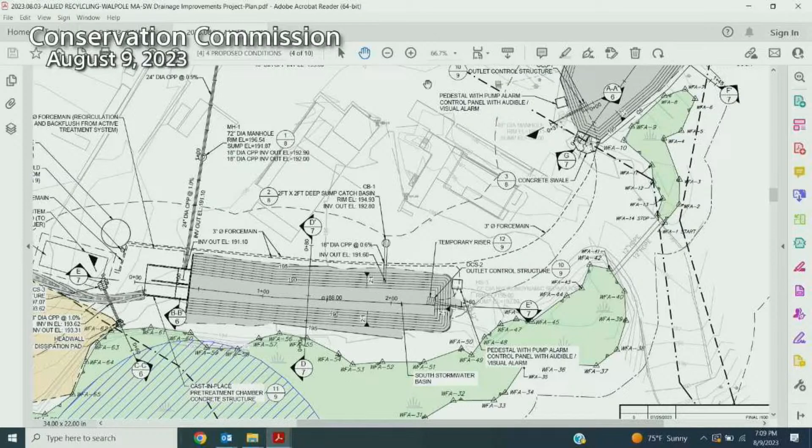They were installed some time ago under previous stormwater standards. These two basins are undersized for today's standards in meeting our water quality objectives under the multi-sector general permit. So we've worked with Allied and DEP to develop a really robust stormwater management system here.

So this involves reconfiguration of the two existing basins. We're going to expand the basins and increase their depth so they have more treatment capacity. And we are installing outlet structures in each of the basins that will be equipped with pumping facilities.

The pumping facilities will pump stormwater from the basin to the southwest corner of the site, where we are proposing an active treatment system. The active treatment system is not being designed by Geosyntec. That's being done by basically a manufacturer of these systems. They're out of Washington State.

The active treatment system will basically treat the water through a combination of coagulation, filtration, sand filtration, and then granular activated carbon. So it'll go through a series of vessels to be treated before being discharged to the adjacent wetland area.

The stormwater network that's existing now will largely remain, and what I mean by that is there's some catch basins and storm drains that capture runoff and drain into each of the basins. The southern basin, which is the long linear rectangle on the bottom of the screen there, will also have some drainage improvements on the site.

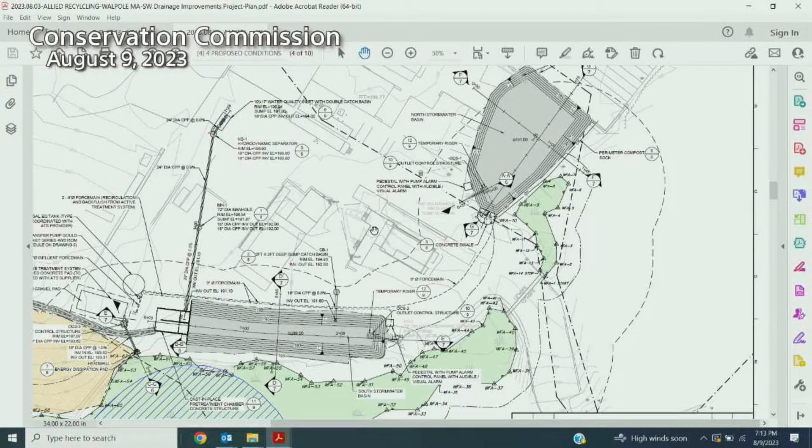But all of the work is within the existing developed portion of the site, including focused work on the two existing basins. Now, the basins, when they're excavated out, will be larger in size and deeper. The basins will be lined with an impermeable liner and covered with dense graded aggregate to protect the liner from maintenance activities.

We did include, as I mentioned, we've addressed the town engineer's comments that were previously provided and have included an erosion sediment control plan within this drawing set and the associated details, and have added some detail onto the pump system, the alarms, and contact information that he had mentioned.

So we do have the additional comments that we received here this evening. Again, I think they appear to be fairly minor and really editorial, making sure that the numbers of the details on the plan sheets match the numbers of the details on the detail sheets.

So I guess I'll pause there for any questions that the commission may have regarding the stormwater management system.

The existing north basin discharges through an outlet pipe to a swale that drains along the entrance road into two culverts that connect the wetland on the east of the entrance to the wetland on the west of the entrance, and then drains down. We're not changing any of the drainage configuration from the north basin - those catch basins and pipes are going to remain.

Really what we're doing here is expanding this basin, as I discussed, adding in an outlet structure. That outlet structure will then pump water through a force main to the active treatment system area. There's an equalization tank that will receive water from both basins to allow constant flow into the active treatment system. But that kind of summarizes the North Basin.

The South Basin is similar. There's less infrastructure currently draining to the South Basin - most of it drains via overland flow around the driveways and through the buildings to the South Basin. We're improving that by introducing some catch basin structures, and those will be connected into the South Basin.

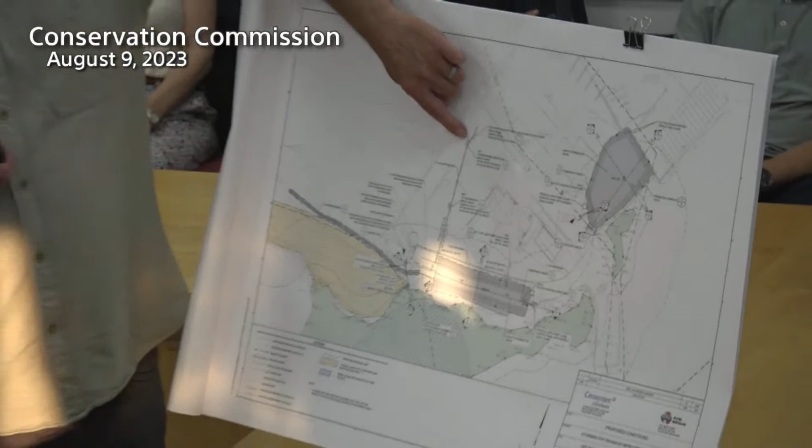This catch basin structure here is the water quality unit that I discussed earlier. It captures a large portion of the industrial area here that drains overland, like sheet flow, down and will be captured in this structure here. This structure will provide some pretreatment. We then have a hydrodynamic separator to provide additional pretreatment.

That drains down into the inlet of the new, or the expanded, South Basin. This unit here will also provide settling and sedimentation, and then that will drain into the basin. It has a nice long linear flow path to the outlet structure. That outlet structure with the pump will then pump the water through a second force main to that equalization tank, which then feeds into the active treatment system.

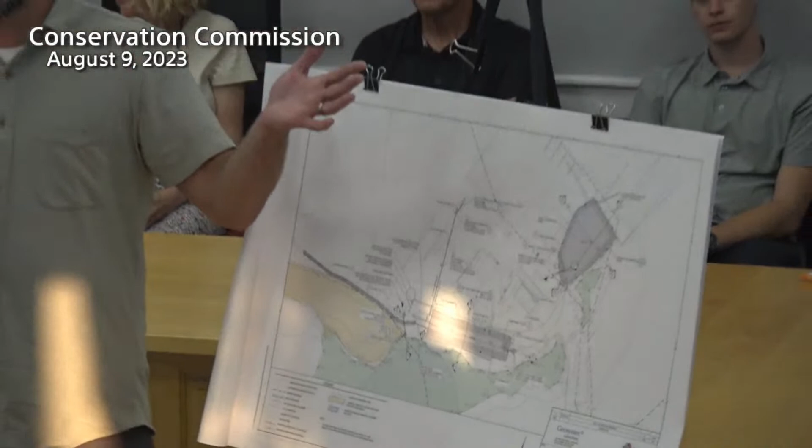The active treatment system looks like a construction trailer, or a Connex box if you're familiar with that. All of the equipment is going to be housed in there. There are a few additional tanks and vessels, like the sand filtration and the granular activated carbon vessels, that will treat and polish the water. Those will be located on a concrete pad in this area of the active treatment system.

Don't think I'm missing anything there. We did add the pump controls and alarms on each of the basins in an accessible, visible location. And really, whenever you think of stormwater management, you're always considering maintenance, right? If the things don't get maintained, they're not going to work properly.

Allied's been doing a great job with their permit requirements, doing over and above the permit requirements to do a lot of the maintenance to the existing structures. These structures will allow easy maintenance as well, such as this pretreatment structure - they're able to actually drive into that to clean out the sediment. So we work closely with Allied to make sure the maintenance requirements for this system is something they're comfortable with and capable of.

And then the active treatment system is kind of another level of operation and maintenance. The manufacturer works closely with the client or customer to develop an O&M plan. They come out from Washington, they start up the system, and they'll work with Allied on a training program to get them familiar with the unit. And then there's a combination of operation and maintenance for that active treatment system.

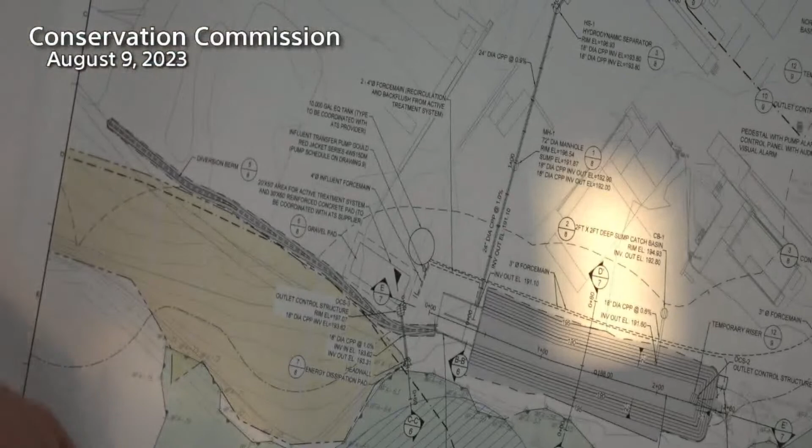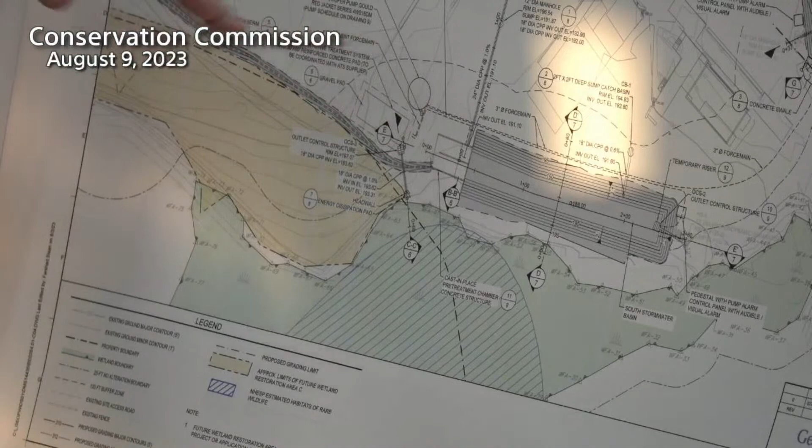We do show here an area labeled approximate limits of future wetland restoration area C. I want to note we added a note that's not part of this project. That'll be part of a future project that will eventually need to be evaluated, but this is here just for clarifying purposes, to illustrate that the proposed stormwater system won't impact that in the future.

And we've been really working with DEP on the stormwater components. They've been heavily involved, so there's been quite a bit of back and forth with the various project players.

So I think that's everything. Any other questions? Yeah, that sounds good, and I had asked for a summary of the changes from the last plan, which everyone has in their packet. Anything else? Yeah, I think it seems to be a well thought out, well detailed stormwater plan.

Okay, Dean? No questions. Okay, thank you. Bailey? Curiosity, who's the manufacturer? Yeah, Water Tectonics out of Washington State. Thank you, that's all.

Thank you. Anything else? Who will be trained? There will be responsible parties listed to contact in case there's an issue at the company? Yeah, so Water Tectonics has an O&M team that Allied has resources to reach out to if there are any questions. And I should mention, the active treatment system is set up so that Allied and Water Tectonics can actually log into the system and see how it's performing. So it's an online system, so they can visually see if there's any trends that would need to be addressed.

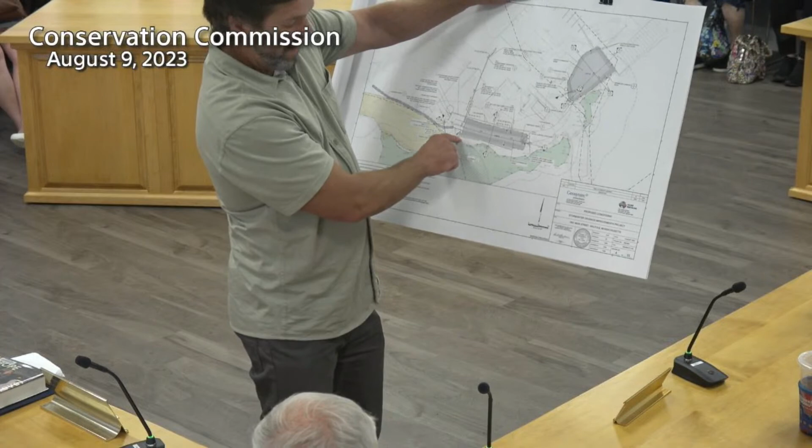Probably a little past that, somewhere in here. Okay, that makes sense. So just mark them on the plan, and then we'll give you the write-up, and it will go on a concrete marker. I have a detail I can send you.

I think what I'm understanding is we can close the hearing tonight with a condition. So we'll address the engineer's comments, add these markers. Usually what we do is close the hearing, issue the condition, and then any outstanding revisions we like to get before we actually send out the order of conditions.

If you can get them back to me close, that would be great, that's the way we like to do it. Okay, thank you. So now, anything else for the order?

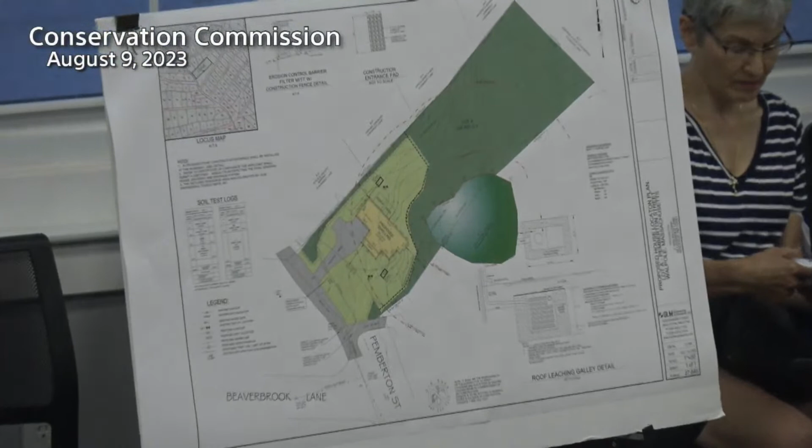We're not proposing anything on the rear of the lot at this time. The proposal is to build a single-family house up on the Pemberton side of the site. We've indicated the 25-foot buffer from the isolated wetland.

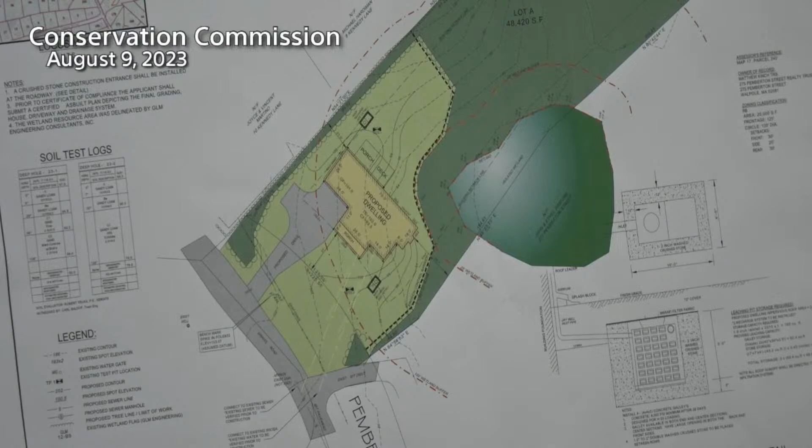Just to point out, this is an isolated wetland. We only filed this under the local bylaw. We did not file under the DEP because it is isolated, and it's only protected under your local bylaw, just to put that out there.

So we've been out to the site. We did a topo survey. We flagged the wetlands. Joyce Hastings from our office went out and did the flagging. We are proposing a single-family house.

I have been out to the site with the town engineer. I dug 2 test holes on the site for the drainage system. I have one in the rear of the property here, and I have one up in the front here. We did not hit groundwater when we dug the holes. We got down approximately 10 feet. We had some good gravel in the area, so it was conducive to provide recharge for the roof runoff.

So we are collecting all the roof runoff from the house, directing it to those recharge systems. There's one in the front right side, and then one in the left rear. We're showing a deck and a porch off the back. The house will be sitting on the street. The garage is on the left-hand side, coming on the front.

There is a walkout basement that'll go towards the wetland area, to reduce the grading around this side of the house. We're kind of matching up to the existing grade on this back corner with the basement level, and then obviously the front level will be higher.

So the lot slopes from front to back, basically from Pemberton Street towards the wetland area, and from the homes along Kennedy Lane towards the wetland area, and then another high point in the back. So the wetland area is the low point on the site, and everything else directs towards it from Pemberton Street and from the portion along Kennedy Lane.

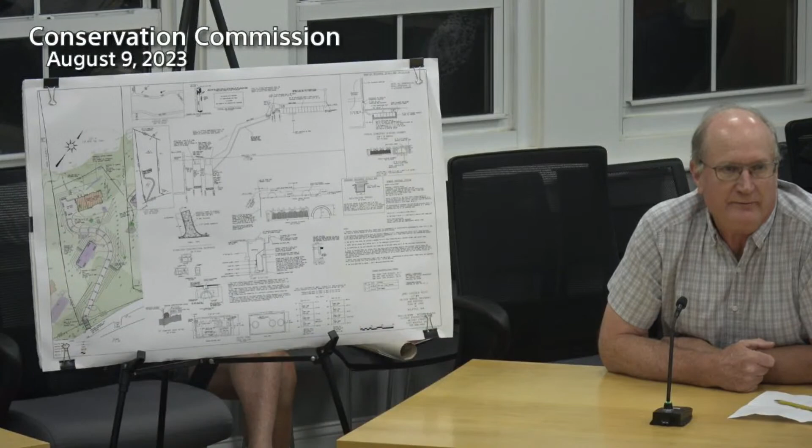So it was a little hard to read because it was so small off to the side of your details. Well, we could have made it at 30 scale, so that makes it smaller. It's basically the septic system plan, so yeah, it's just the septic system plan.

And my other comment, I forgot to write in my report, but the erosion control should be hooked up along the boundary of the property line going this way. Unless he's doing that lot too, but it just kind of ends here at elevation 176.

Oh, does it go up there? Yeah, it's hard to see, sorry about that. It's hard to see. I see it now. Okay, yeah, all right, no problem there. You know what it is, the AutoCAD's in color, so they see it, and then the draftsman...

I have another comment. The roof infiltrator that you have kind of smack in the middle of the backyard there, is there any way you could put it off to either side? I was just thinking, often with these houses they want to do something later on, a pool or a patio, and that's in their backyard, and you have the big, long infiltration unit in that area where someone would probably want to do something else.

It's more of a practical comment. Yeah, so what the draftsman's trying to do, because this is what I'm always telling them to do, he's trying to follow a contour line so that it can be placed shallow under the ground for its entire length. What I could do, it's a walkout, so we only need to be 10 feet from it, and this is going to be leveled off, so I could just run it that way. I think if there's going to be a pool, it's going to be more than 10 feet from the house. Or I could put it right at the very limit of work.

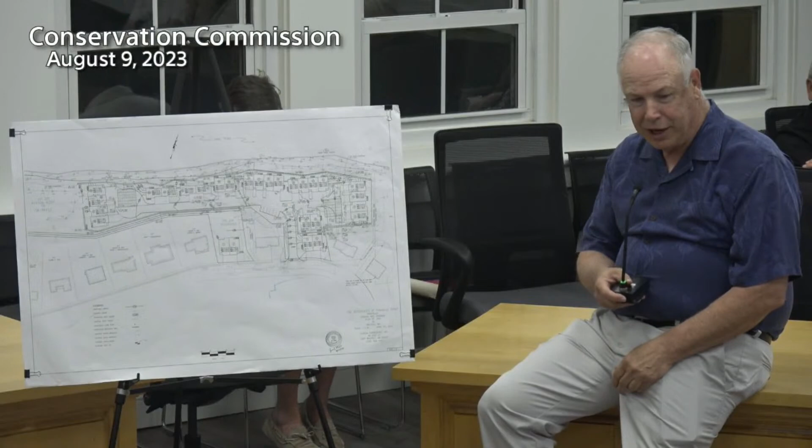No, okay. Representing the applicant: good evening, Lou Petrozzi for Wall Street Development Corp. Essentially there are two parts to this request for determination. One is to provide clearing so that we can go in there and do testing and other work related to our proposed project for the development of the parcel. In reading the regulations I thought most of this work was permitted as incidental to the property, but Landis suggested I come before the commission to discuss what we're planning. As you can see, this is the proposed development site along the pond. We have to test for stormwater management at each end of the site.

In addition, we need to do soil testing along the roadway for stability and ground conditions to investigate the site. I don't know if you've been on the property lately, but a couple of years ago we did cut it, and the commission fined me for cutting it. But it really is overgrown with, I call it invasive species, and it's practically impassable for us to get down there. So we would like the blessing of the commission to go in there and do what's necessary for testing on the property.

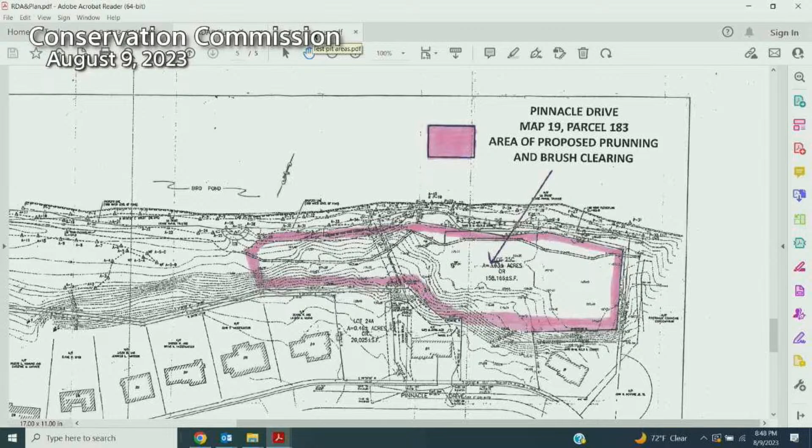So the plan that you submitted with your request for determination was this plan? Yes, you're right — I didn't have that with me, I just had this in the car. Your request is whether the area depicted on the plan and map reference below is subject to the jurisdiction of the Wetlands Protection Act — that's one item — and the other is whether the work depicted on the plan is subject to the Wetlands Protection Act. Right, and on this plan you phrase it as proposed pruning and brush clearing. Yes. In the determination you refer to it as annual maintenance, cutting and/or clearing of brush and other vegetation. Correct.

So, I guess first of all, it's not really clear what you want to do here. It looks like you want to prune and brush clear, or cut and clear brush and other vegetation, in this whole pink area.

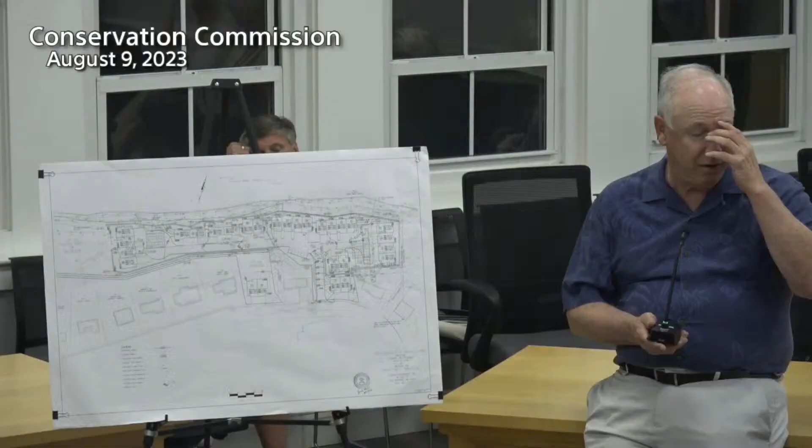Yes, and since I sent you an email, I had given you examples of the equipment being used. But in addition, we need to get into the property and go a little further to do a couple of deep hole tests for our stormwater management. That's why I brought this plan tonight, to show where we have to go. We have to go down to this area and do some testing, and while we're there, do some testing to see what the soil conditions are along the proposed roadway.

So I guess it's expanded beyond what was originally submitted. Right, so when you submitted before, you indicated it was under 10.022B to G, activities that are temporary in nature for planning and design purposes.

Yeah, so what we discussed was the brush—my experience with engineering practice is they cut a very narrow swath for a mini excavator to go in, pick a spot, excavate, do a test pit, and go along the same path. They may go to another area and do a test pit. You submitted a drawing that showed two test pits, so I think that was the guidance at the time, that you were just going to those two areas with just a path going to each area, and that was acceptable practice.

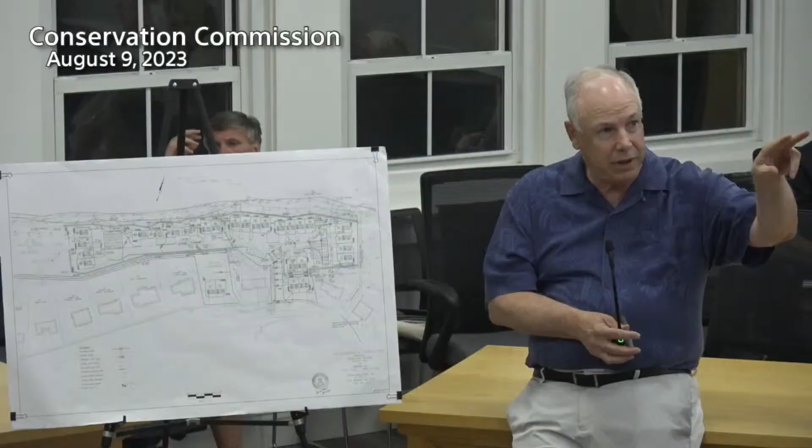Right, so is that the plan I submitted that's on the screen right now? Which is this plan right here. All I'm simply adding into this equation is that we're gonna do some testing along the roadway, just along this area right here, to see what the soil conditions are.

Well, what you've submitted is a rather large area of the lot that you are proposing pruning and brush cutting, or clearing of other vegetation, and that's what you're asking for the determination.

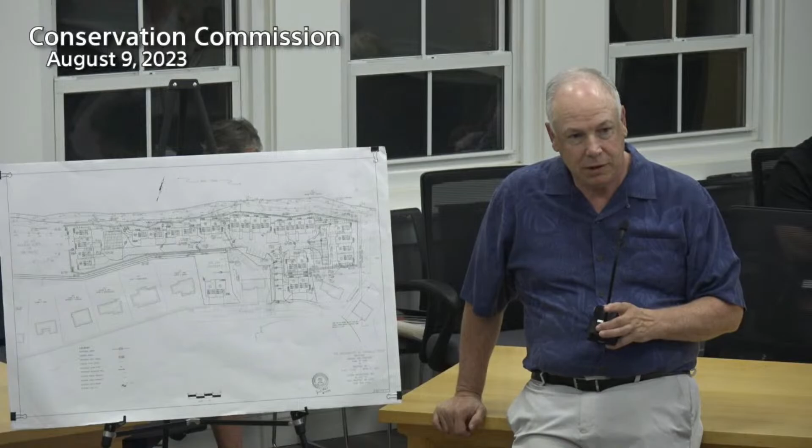So where did I submit that plan right there with the test pits? Isn't that part of the same submission with a letter? Well, it's been a while since I submitted it, so— I didn't think so. Whichever plan was physically attached to the determination, as well as the description in the determination, being annual maintenance, cutting and/or clearing of brush and other vegetation.

Well, we want to be able to walk in there and clear the brush, okay? As you probably know, this is all paved area, a parking lot. So we want to go in there and clear it down to the ground—it's mowable with that machine I gave you a photograph of. So we want to do that, and then we have to go in there and do testing.

I mean, what can I tell you? We have to test for the soil conditions for the stormwater management. So now I'm directing my comment to the commission.

If the area depicted on the plan is subject to the Wetlands Protection Act, I would say yes—it's buffer zone and riverfront area. That would be a positive, that the area depicted on the plan is subject to the Wetlands Protection Act. If the proposed work is subject to the Act, again, I'm getting kind of mixed on this—if you go by the determination, it's the purple area, and that seems like that's beyond the temporary path for tests for planning and design; it doesn't really meet that exemption.

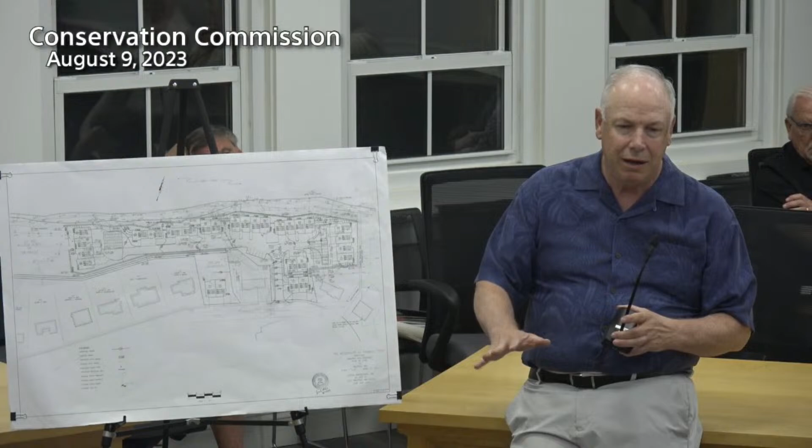When you say clear, we're not clearing, we're just brush cutting. It says clearing on it. Brush clearing, which is twigs, things under an inch in diameter, kind of stuff. I think the point is, there's one thing about getting to an area, as Landis described, where you want to do a test pit—you make a path, do your test pit, and go out.

So it would not be a complete area. You're not going to do a test pit, you're not digging up this whole area for a test pit. No, but we're gonna probably do sporadically along this area here.

You folks know you're gonna basically say, well, what's in the soils? So we want to be able to come back and say we did testing on the site and this is what we found. Whether or not you want me to come back with another application, I will. My original intention was to come in here and clear this. Since then, we've had several meetings with the zoning board, and they've given us comments, and we need to go in and determine for our stormwater management what the soil conditions are.

You don't want to allow me to do that. No, you are allowed to do it, but not to clear the whole area to get to a test pit. That's the point. If you want to clear the whole area, then tell us that's what you're going to do, and then file appropriately.

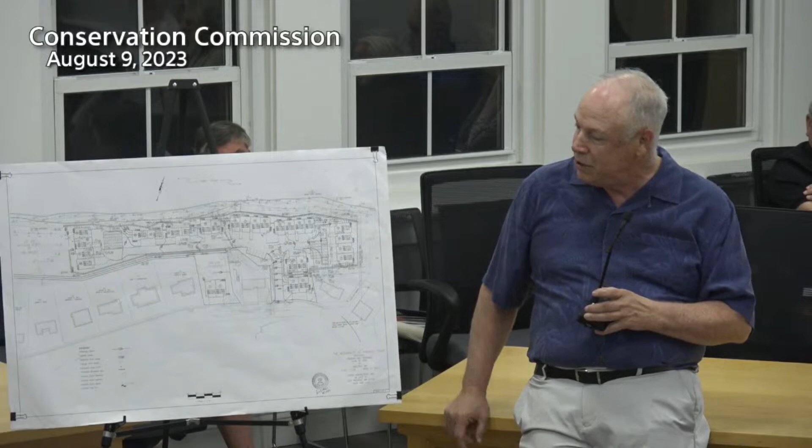I don't need an engineer to tell us where we're testing. We know where we said we'd test it, Lou. You said it, you said you need an engineer. We're testing where the stormwater management facilities go, and along where the construction of the roadway is gonna go. Lou, pretty plain and simple, you said on television that you needed your engineer to show exactly where your test pits were, and I'm agreeing with you.

Okay, so the engineer should put them on this plan? Yeah, and it shouldn't be a bunch of photographs. Understand that you may have to change the location of a test pit, but it doesn't change how you get there. I'm not saying it does. All I'm saying is you may need to do more test pits, that's understood.

I provided a photograph of the type of equipment we were gonna use. It's a minimal size. I presumed maybe it's 10 feet, I don't know, but the email I received back indicated I was permitted to go forward and do this. Now you're telling me I need a path for my machine.

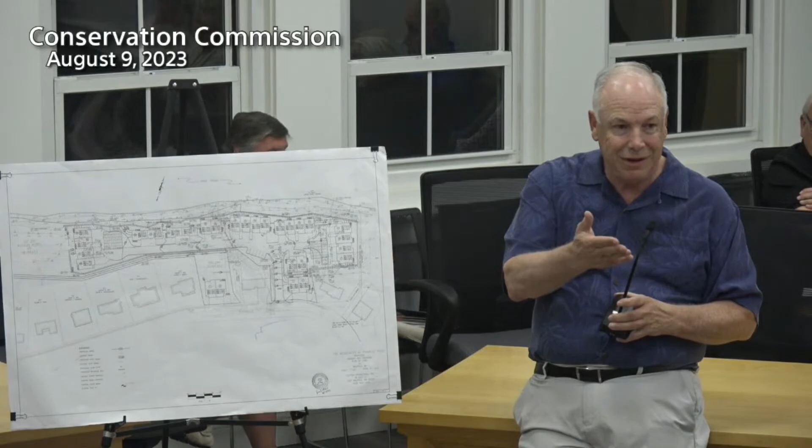Well, 2 spots, right, 2 spots, mini excavator to that spot and back. That's not what this is. This is very different. So if I want to, hypothetically, come back and restore the paved area that's there as a parking lot that was there previously and still there, you'd be objectionable to that?

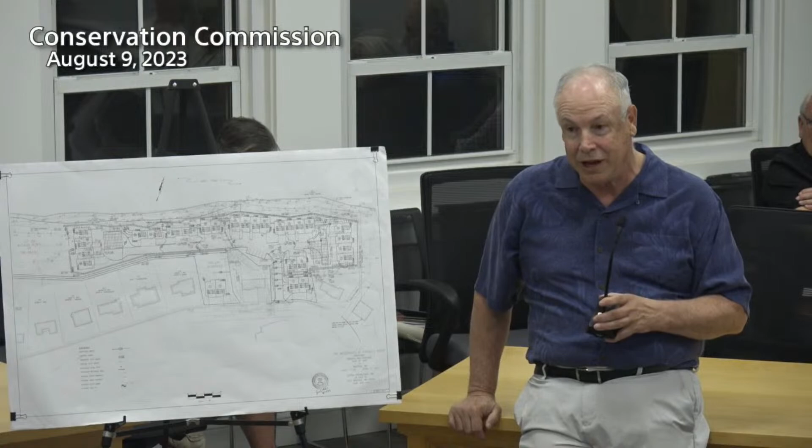That wouldn't be a determination, Lou. Okay, well, I'm just bringing it out. I mean that whole area, this whole area is a parking lot that's been there for 100 years. Okay, that's not really relevant. So what do you want me to do?

You want me to come back with a revision to what you've got? You want me to give you a description? Yes, okay. What we need is the description, it should be that your engineer puts the proposed test pits on a plan, not a description or a photo.

I have test pits on the plan. That's where they're going. Anyone in the audience have any questions or comments, please identify yourself for the record. Okay, hearing none.

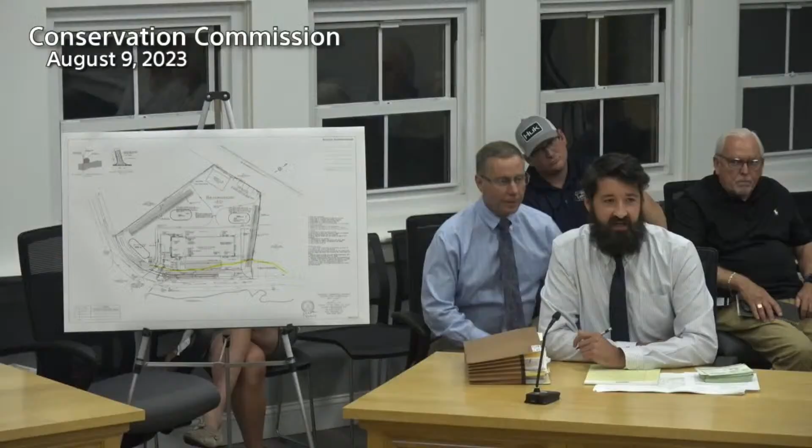Good evening, Mr. Chairman. For the record, my name is Cameron Gray. I'm here on behalf of the applicant, Sal Corporation.

The current stormwater report utilizes rainfall depths from TP-40, which were acceptable when originally permitted. Current regulations require the use of depths from the Northeast Regional Climate Center, an increase from 7 inches to 8.9 inches on the 100-year storm. While the current design pretty much contains runoff on site for the 100-year storm at 7 inches, it likely would discharge to West Street with the 8.9-inch runoff depth.

If the board granted a waiver for this, I would not object, although an issue of equity lies in the balance. Note that even without the proposed drainage, the site has not been problematic. The plans agree with the drainage report and design, and details are well prepared. I did not object to any decision the board makes; however, given the lack of problems currently, the proposed design, if and when actually constructed, will serve well.

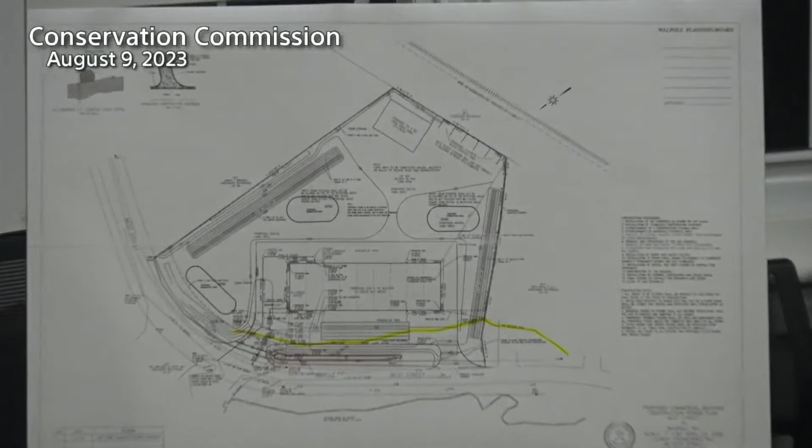This site plan shows the above-ground stormwater infiltration basin in the front of the lot in that grass area. That's what I have shaded red out front there. The yellow line I have highlighted is the 100-foot buffer. So you can see on this site plan, the basin is entirely within the 100-foot buffer zone.

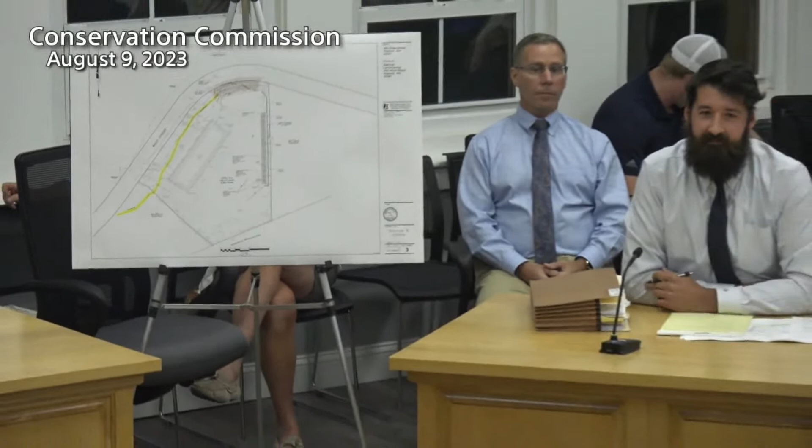So we're proposing, in our proposed plan, to move the basin to the eastern corner of the property. If you're looking at it from the road, it'll be located to the left, and that catches a portion from that trench drain. Currently on the site there's a depression there, and the trench drain just drains into it. So we're proposing essentially to just expand that depression into an above-ground infiltration basin.

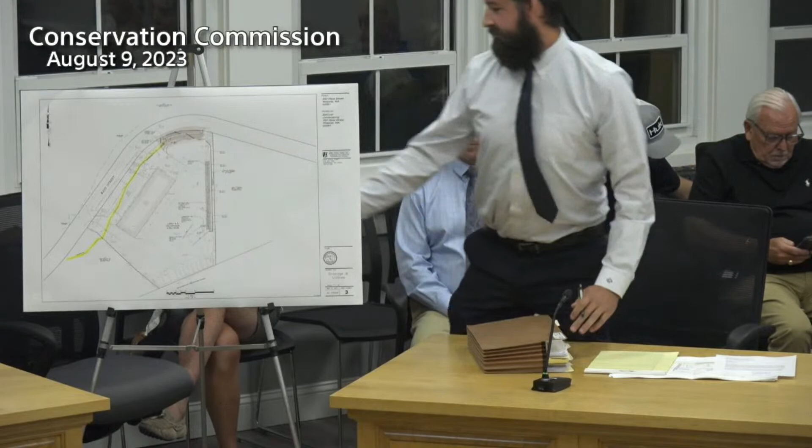Want to show us where you're talking about on the plan, please? Yep. So again, just to show you... use the microphone. Oh, sorry.

So what I have shaded in red is our proposed basin, and again, this is our 100-foot buffer line. It's hard to see, but in the existing conditions there's a depression right here, lined with riprap, and this trench drain currently drains into it. So we are proposing to expand that depression into the above-ground infiltration basin.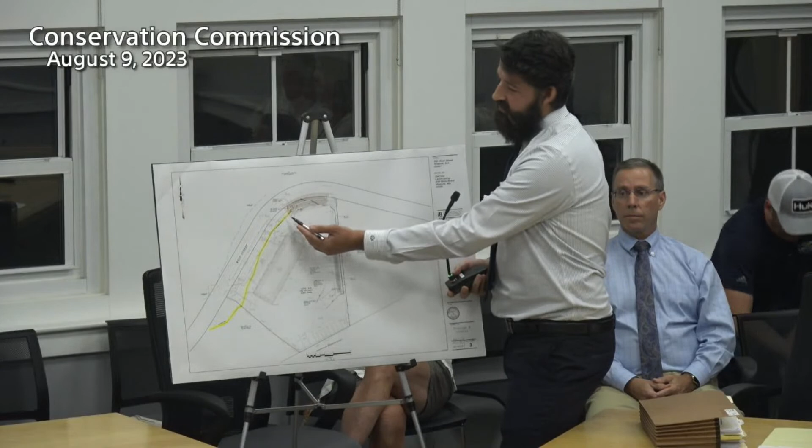By doing that, we're pulling essentially almost the whole basin out of that 100-foot buffer zone that was originally proposed on the first site plan, so only a small portion of this basin will be within that buffer zone. We're going to be roughly 86 feet from the wetlands, and this basin has been designed to handle up to the 100-year storm. I think that's really it in terms of changes within the buffer zone.

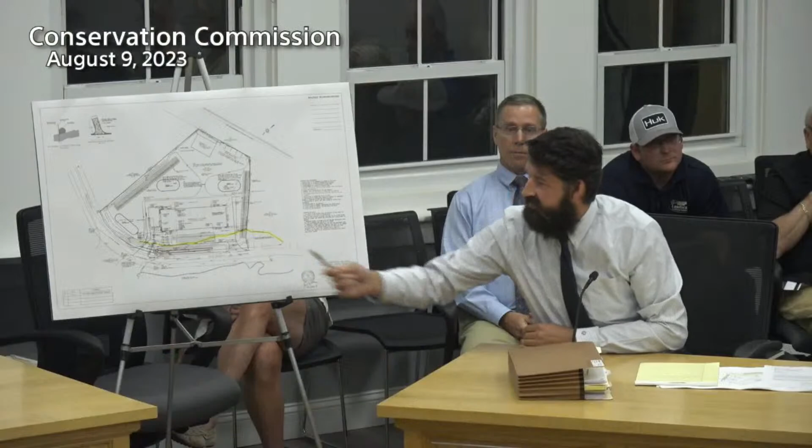Okay, so originally the stormwater design, you don't have the original plan, right? So it showed infiltrators on both sides of the property line, in the rear part, one which was not built. So if we're looking at the original site plan, these basins in the back have not been constructed, as well as this basin out front, but this basin here underneath the parking lot is constructed.

So based on the original plan, you have less stormwater BMPs than for the new design, and as well, the stormwater erosion control bylaw and the wetlands protection bylaw were revised to include the rainfall data, which increased - that's one of Carl's comments. So the rainfall data increased what we now design storage systems for, and you don't have as much storage as you did before, so can you justify the current design?

So when I first designed this, not aware that the bylaws had changed, I used Glossa's engineering - we have his stormwater report - so I just mirrored it. When I ran it through HydroCAD, I actually came up with a lower runoff in terms of volume, but I used the old rainfall data. So I could run it through HydroCAD again and design for that new 100-year storm to ensure it's not increasing the offsite runoff.

Yeah, Carl and I talked about this, and we're both kind of on the fence because of the area it's in. It's not a residential area. It's not an area where if the system couldn't handle the stormwater it would be a major problem, other than going out onto the roadway and across the street to the pond.

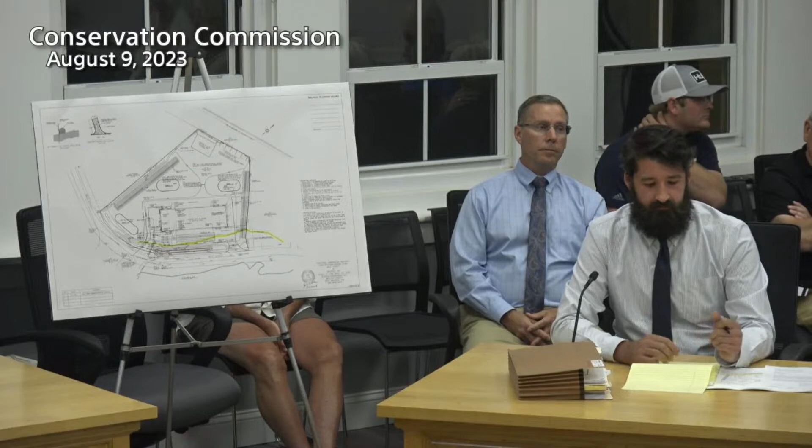So if you can - I know our next meeting isn't until September 13th - it would be continued to that. Does the Commission have any other comments? Dean? No questions. Haley? No questions. Media? Al? No. Betsy?

Okay, so you're going to use the revised rainfall in your calculations and make whatever changes would be necessary from that. Anyone in the audience have any questions or comments? Please identify yourself for the record. Hearing none, I want to make a motion to continue the hearing.